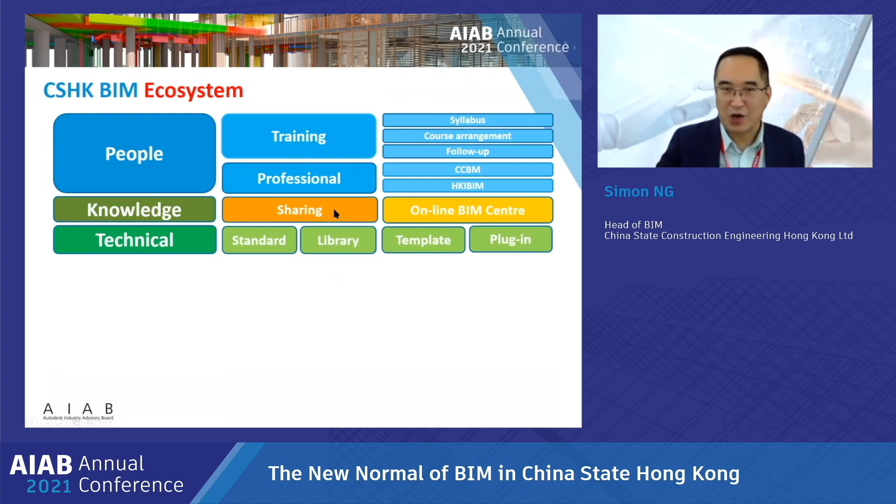Let me talk about our ecosystem. It consists of 4 parts. First of all is the people - we provide training and development to the professionals. Secondly, we provide knowledge, knowledge sharing, and an online BIM center. The third one is about the technical system - we have a standard library, templates, object library, plugins, those kind of things. And finally, we have the strong technical engine.

So we are pointing at our projects - we want to apply this to the projects. We have a team to develop the platform, tools and workflows which will be applied to the projects. The major software tools we are using are Autodesk based - mainly we use Revit, Civil 3D, and Navisworks. For the online platform, we use BIM 360, and we also have some development tools such as Forge and Unity.

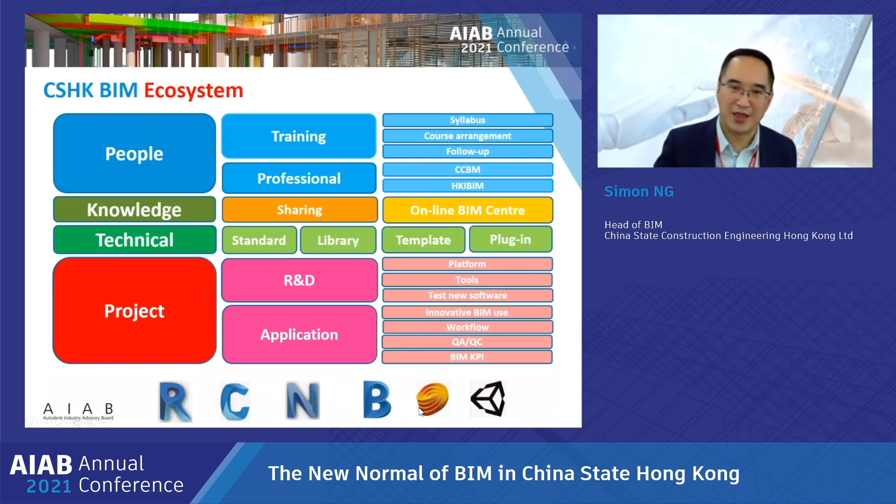Okay, so let's look at our BIM center. This is the center where we develop our people. Every day we conduct in-house training, developing different training programs to suit different needs. For example, some engineers need to produce modeling, documentation and drawings, so we offer full BIM, full Revit training for them. Some engineers only need to view the model, walk through it and present clashes, so we also offer such courses. Some people need management training, for example project managers, so we train them on how to manage the project. We also have specialized training programs for QS and BIM staff.

Okay, so this is our online BIM center. We provide updated market information and technology information across the company, which can break through the barrier across different projects.

Okay, so next, our technical system. We have four things: the BIM standard, the BIM object library, the Revit template, and the API plugin. All four are interrelated. For example, all the families in the object library follow the BIM standard, and the API plugin makes use of the template to automate some processes, but follows our standard.

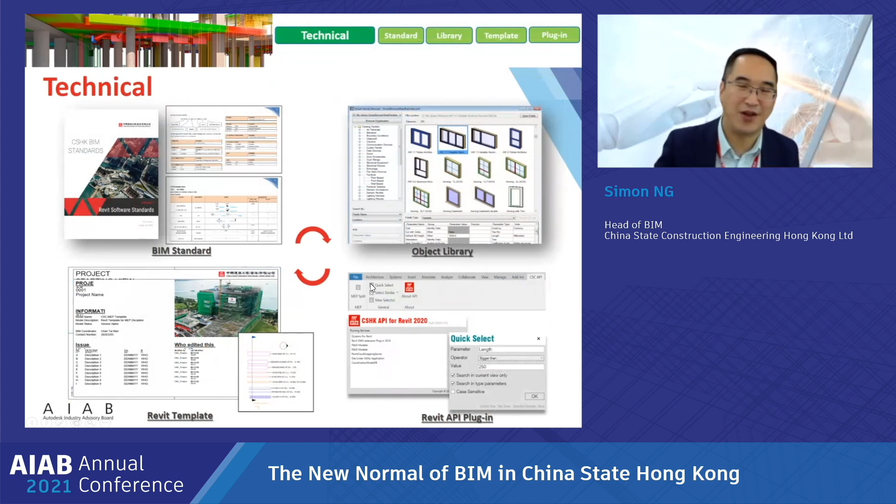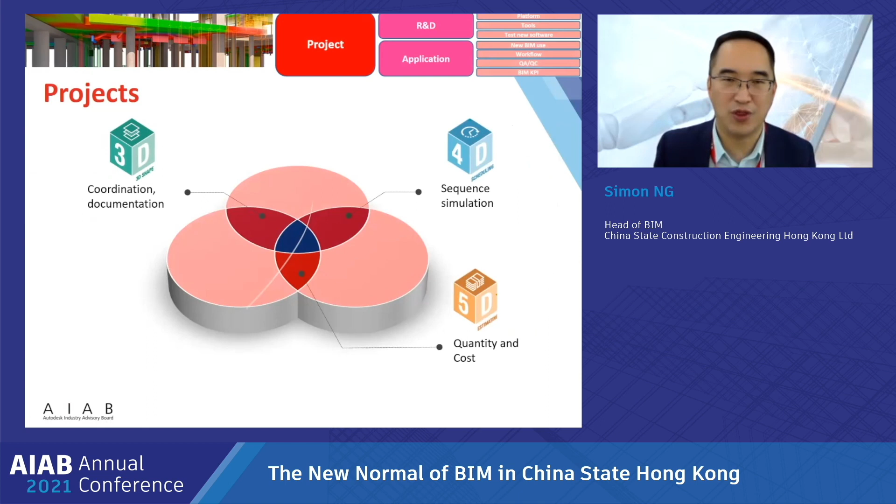So talking about the project systems, we have developed some normal BIM uses. Apart from the government mandates - everyone may know that government mandates 3D, 4D, and 5D - even though there is no mandatory requirement from the client, we will do 3D, 4D, and 5D in our projects. This is our normal use. We also provide a CDE, common data environment, using the BIM 360 cloud platform for all our projects. So 3D, 4D, 5D, and BIM 360 are normal to our project.

And then we have a number of innovative uses, such as VR, AR, and laser scanning. We will determine whether we use these depending on the needs of each project. We will also develop a lot more innovative uses, which I'm going to describe.

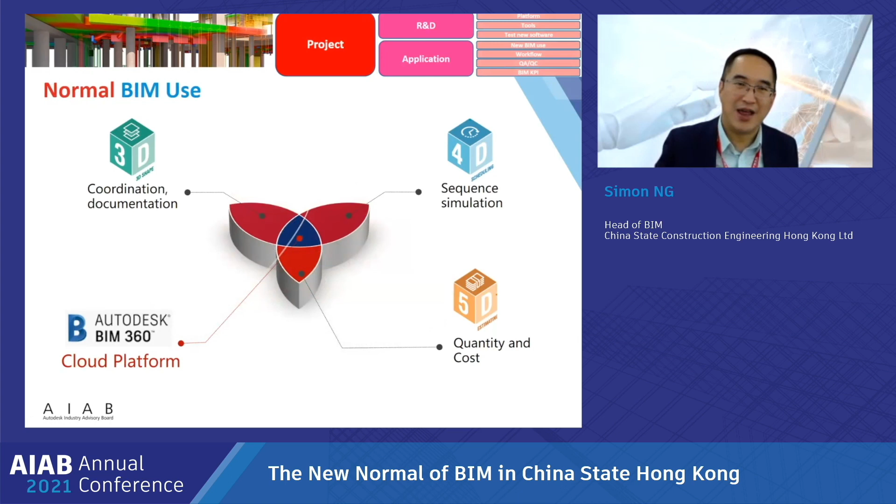So let's talk about our normal BIM uses: 3D, 4D, 5D, BIM 360. First of all, 3D - a lot of people know this is 3D coordination. But our target is to do real BIM, true BIM, which means we do 3D first and then generate 2D drawings. We don't do retrospective BIM. This is our target.

To facilitate that, we have developed some plugins to enhance our efficiency. For example, everyone may know that the most challenging thing for drawing production is the tagging - how to align all the tagging in a nice manner. So we have developed some tools to automate this process.

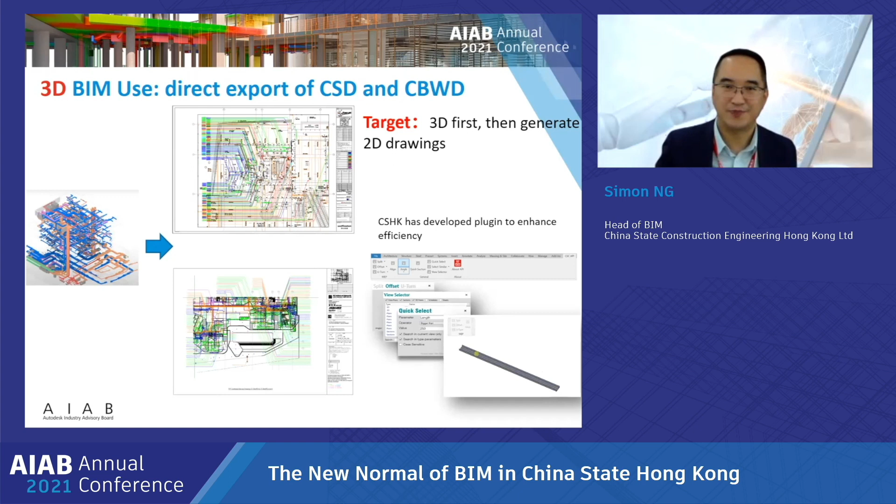So for 4D, our target is that we don't want 4D to just be a video deliverable sent to the client, that's all. We want to make 4D a live model that will be reviewed by our construction team from time to time. So we will produce 4D viewers and also trainings for the planners. We want 4D to be a matter in our progress meetings, to review and identify if there are any illogical things. This is part of what we call 4D clashes, apart from the 3D clashes - we also have 4D clashes.

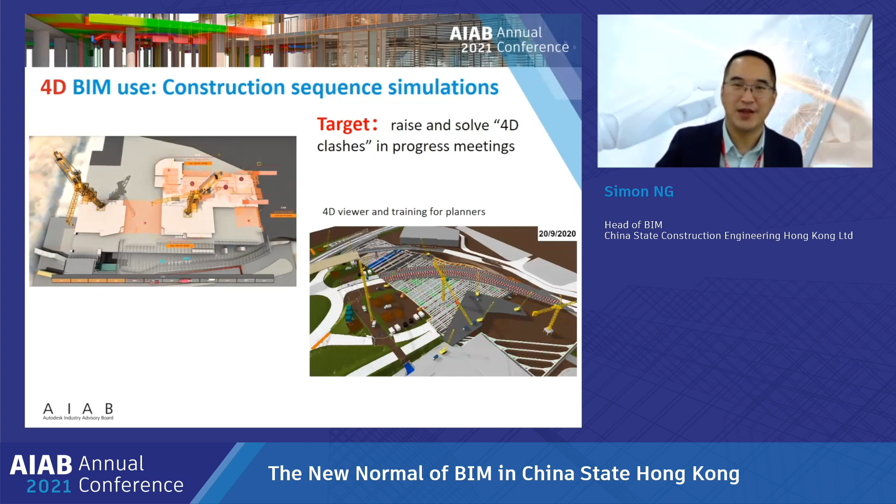Similarly, for 5D, we want QS to use BIM as normal day-to-day work. QS can obtain the BIM model to perform quantity takeoff. We have adopted a specialized QS software called Cubicost. The beauty of that is it meets the SMM for QS practice in Hong Kong, and it can produce the BQ of some elements that normally aren't easy to produce from Revit, for example concrete quantity, formwork, and rebar. We apply that for interim payment, VO, and remeasurement.

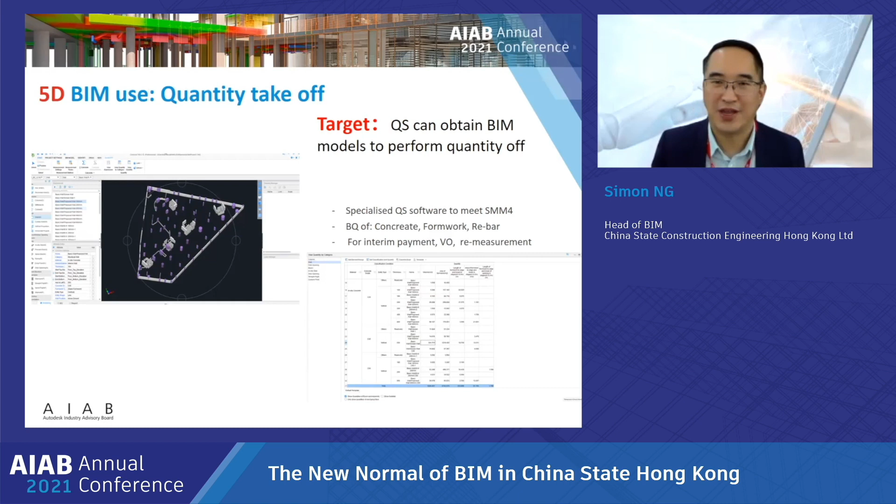So next one, common data environment, BIM 360. A lot of people understand common data environment as just a common platform for data, right? Technically yes, but I think the CDE is more about the management side, the information management.

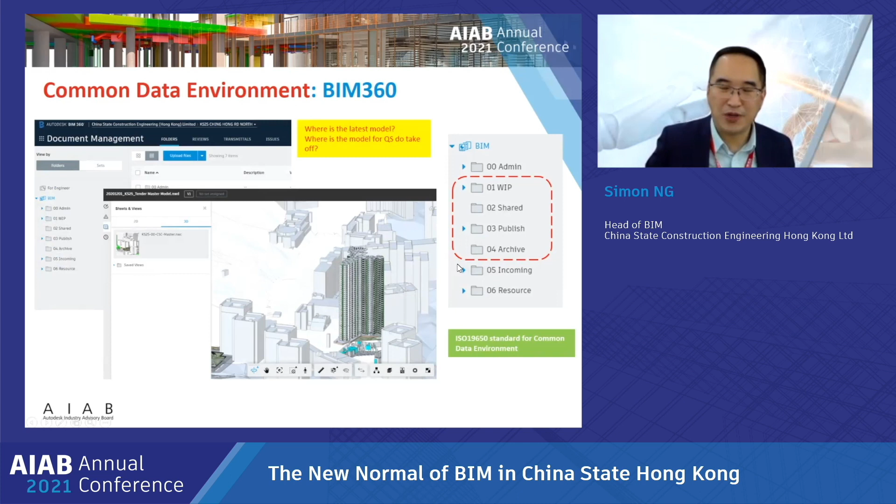For some questions, for example, where is the latest model? Where can I find the latest model? And if I am the QS, where can I find the model for takeoff? So in ISO 19650, it produced a very good standard for us, which is a 4-container concept.

So 4 containers, usually 4 subfolders: WIP, shared, publish, and archive. WIP means it is a working folder, so it is definitely the latest BIM model. It updates every day, every hour, but it is not yet finished and nobody verified them. So this is the working folder.

When it is complete to a certain stage of design, it will be verified by the discipline leader, and then go to the share container, the share folder, which is for coordination or other purposes. So when they share, we collaborate with other disciplines.

And when some problems come back, it may update the design so that it goes back to WIP and share. This is an iteration process until it is well coordinated and ready for submission to the client. And then it goes to the published folder.

So it is approved by the project manager or BIM manager. So this is published. And finally, archive.

One analogy I always use is a kitchen. WIP is the kitchen where they produce the ingredients and raw materials. When they're ready, they put it in the cook, which is shared - they fry everything all together. And then when it is finished, it goes to publish, which is the dishes.

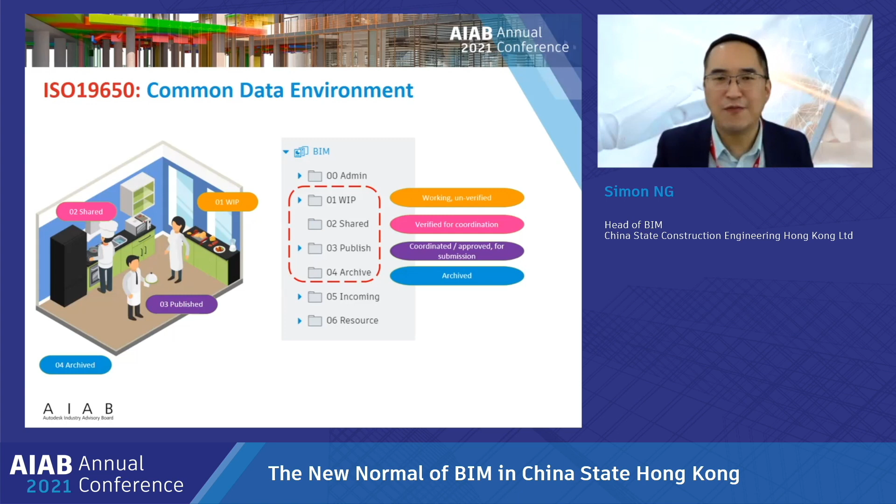So this is about the information management concept. ISO 19650 is about the information flow. We put it in our standard, and also in each BIM project execution plan, so that everyone knows where they will input the information, and where they will find the output of the information.

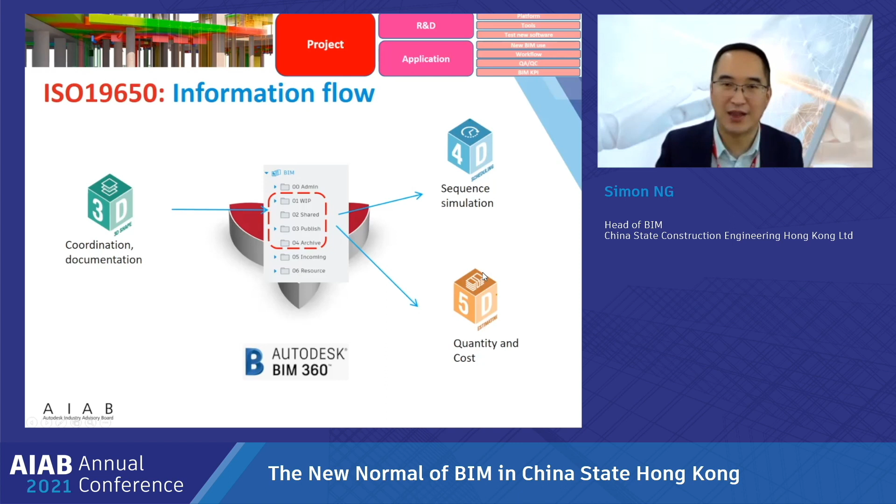For example, a planner will know where to find the model for their sequencing, and the QS will know where they can find the model for takeoff. Apart from our normal uses, we have a number of innovative uses. Let me go through one by one.

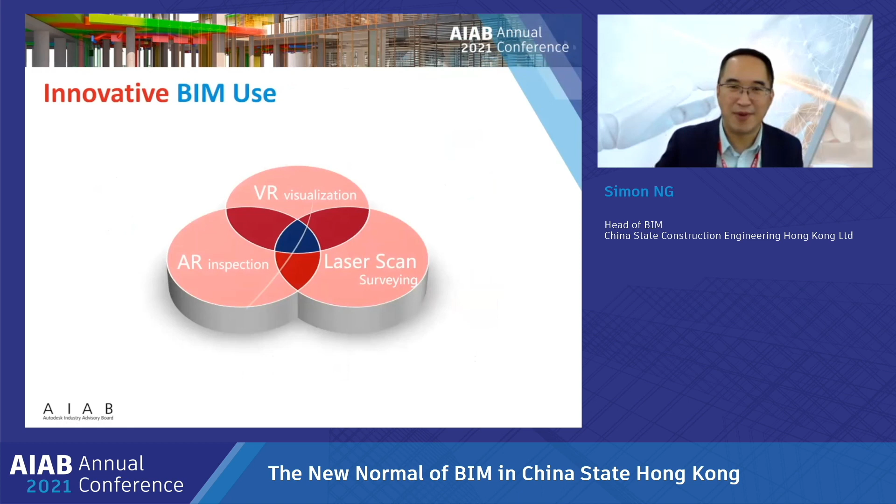First of all, this is about VR. Everybody may know that. In our company, we have adopted what we call the 2nd generation of VR - the Oculus Quest 2 headset, which is Wi-Fi based, and also enables multi-users.

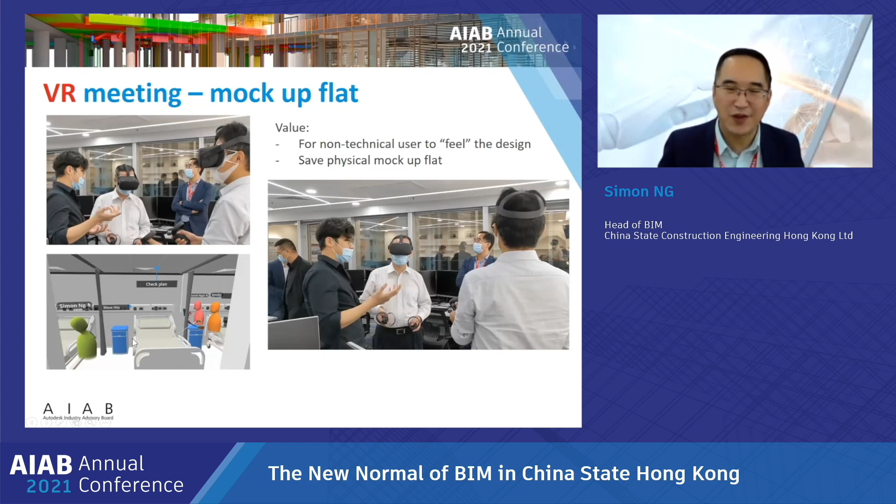The beauty of the VR meeting is to produce a mock-up flat so that it can enable - you can see this is a sample mock-up meeting - the non-technical user to have an immersive experience on the design. For example, this is a hospital design, so that the doctors and nurses can really feel the design, how they operate the hospital.

So apart from the visualization done by VR, we also make use of BIM for inspection and progress checking. The AR is a good tool we developed. These are the use cases where we overlay the BIM model with the site condition.

This is checking of the opening position - we see whether the opening positions are correct, and also the MEP routings. Another use case is the prefabricated facade. We don't want to find that it is not correct when it arrives at the site.

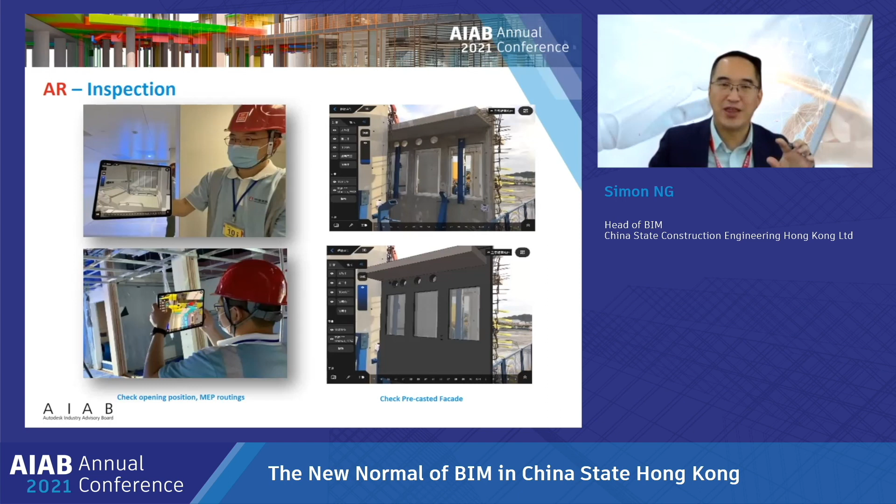So we perform the AR checking when they are in the factory. This is very good for AR inspection, providing a handy tool for us to do quick inspections. But to be honest, the accuracy is not that high.

So in some cases when we need high accuracy, we need to use laser scanning. For example, for structural elements, particularly in places where other services need setting out, like the lift shafts, or the structure for handling and connecting the facade. We need very accurate setting out, so we make use of laser scanning to scan the whole inside site condition.

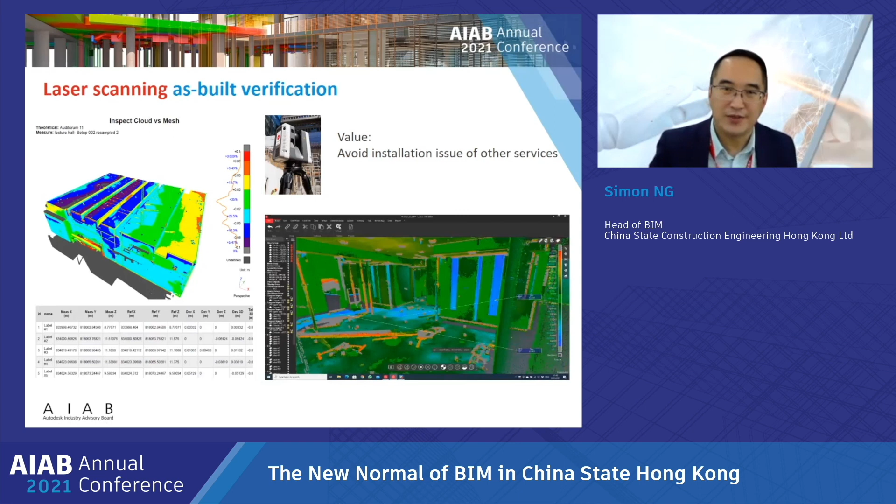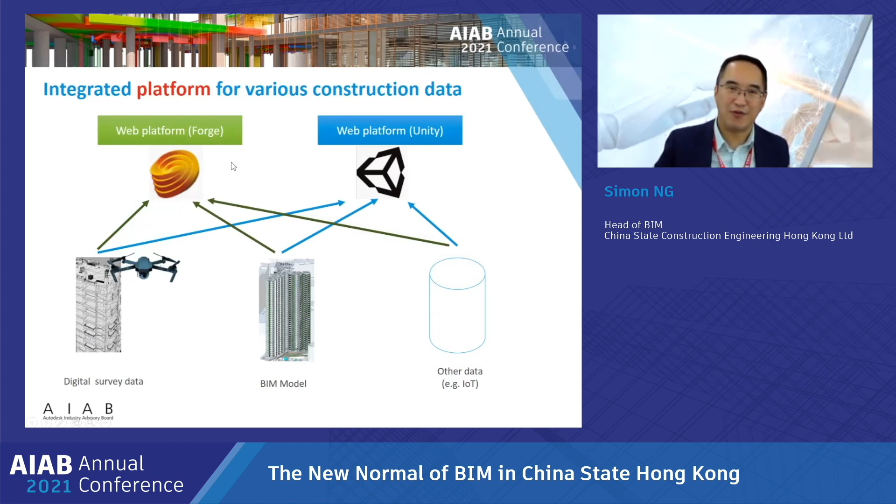We are doing a lot more of these 3D digital surveys, so we also need to develop a platform for various data. We get the digital survey data from laser scanning or drone data, and we have the BIM model, and other data such as IoT. We make use of two different tools, one is Forge, and the other is Unity.

Here are some examples. This is a formal photogrammetry. We set up a web platform very similar to Google Maps, so the engineer can easily obtain the latest site condition. We can do simple measurements, so the engineer knows the site condition well and can make a better decision.

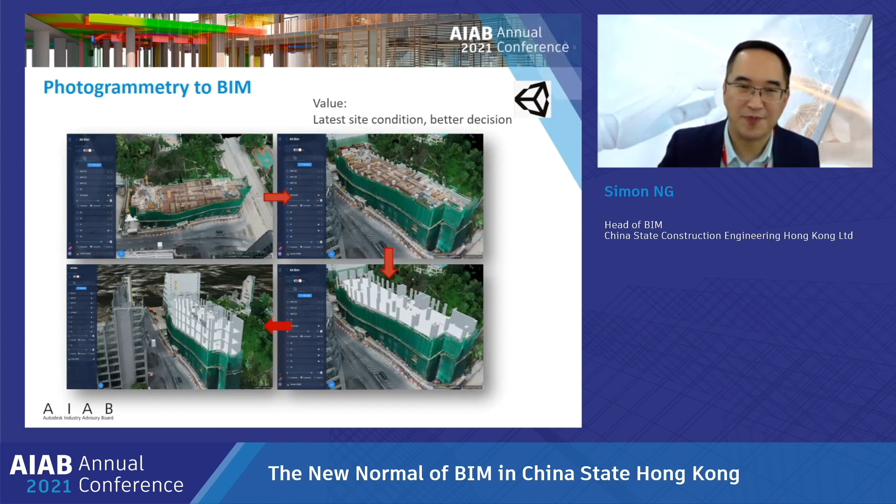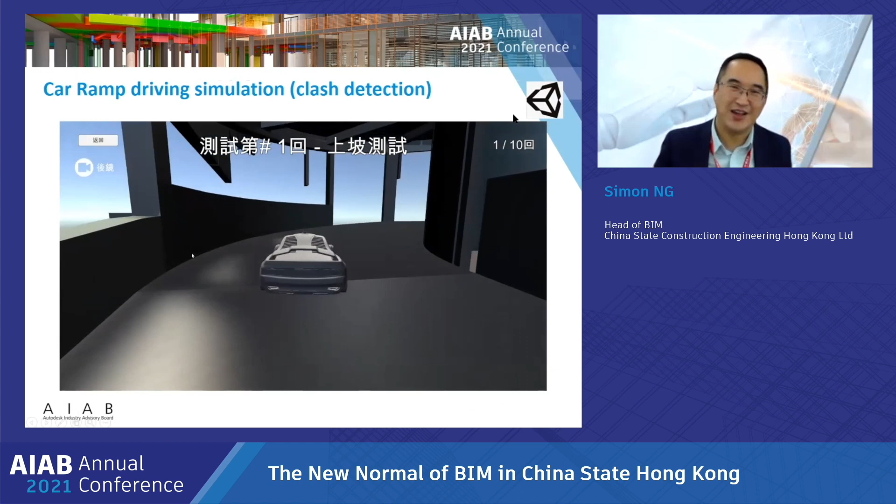This thing is very interesting. We use Unity to simulate a car that goes up a car ramp in a project, and we do clash detection to see whether there are clashes when the cars move up the ramp.

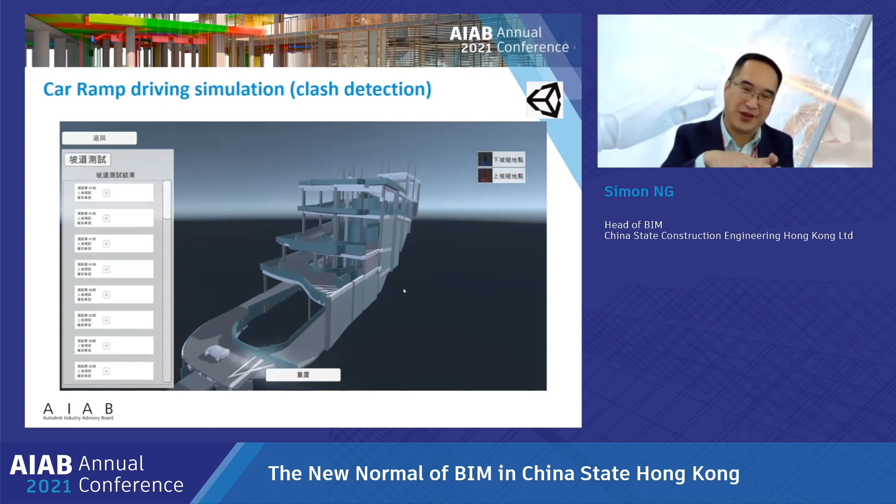So here is the result. Let's go to the result. This shows where the ramp will clash with the bottom of the car. Let's go to the result - okay, so this spot is the clash point.

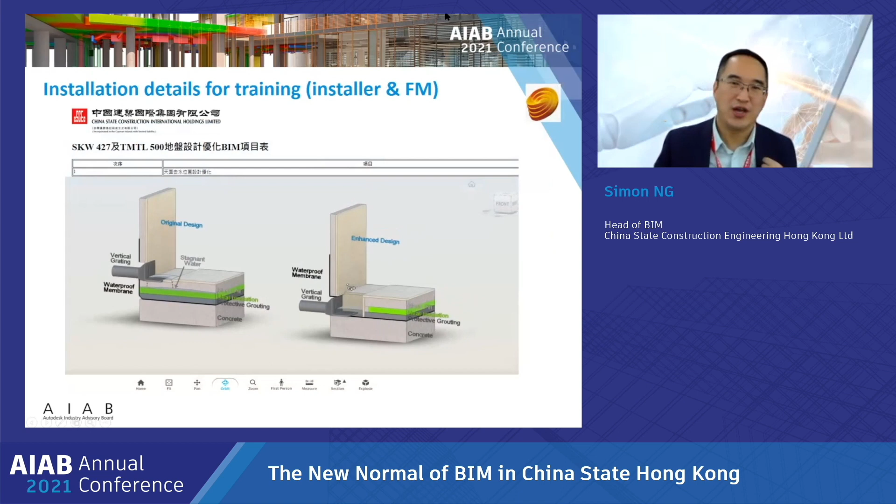Very interesting, right? Another application is that we make use of Forge, because with this we build up installation details. It is for training the installer and FM. We are using an explode function of Forge so it can give a very detailed explanation to the installer and also the future maintenance staff.

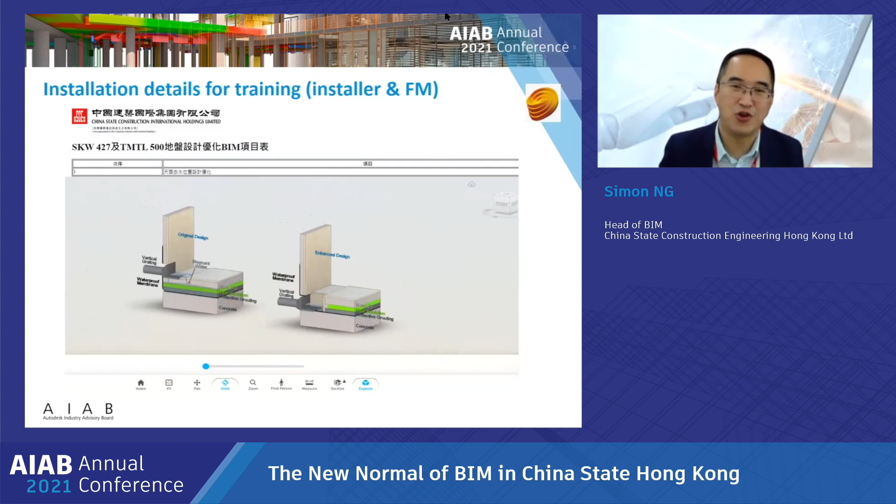Next, we also use Unity and Forge for integration with our smart construction site, which we call C-Smart. Our C-Smart site is an IoT platform with big data and AI, managing workers, machinery, safety, quality, and progress. With the integration of BIM, C-Smart becomes location based, so we can clearly see the distribution of workers in the BIM model. This helps management make better decisions.

So with so many BIM projects and BIM users, we will also set up a BIM KPI. We review each project and give them some scores according to the BIM use, the width of use, the depth of use, and also the participation - for example, how BIM is participated in by other teams.

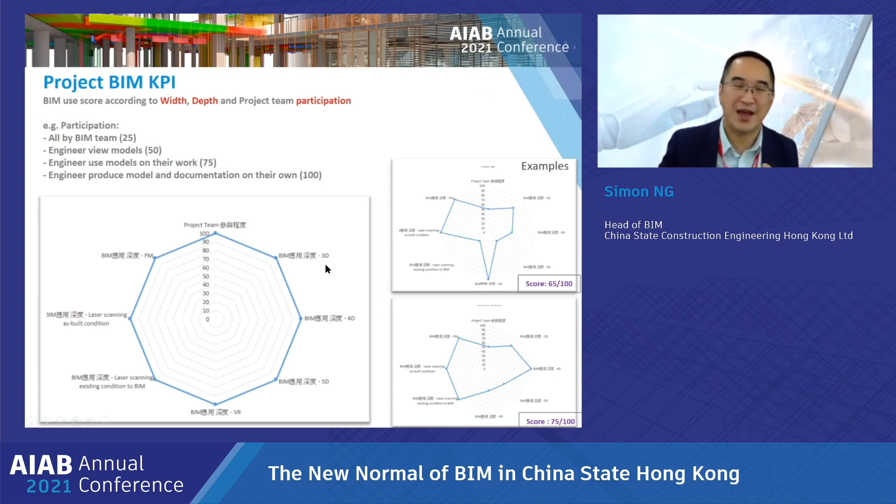If it is only used by the BIM team, that's 25%. If the engineers also view the model themselves, that's 50%. If the engineers not just view the model but also use the BIM models in their work, for example going to meetings or documentation, that's 75%. If the engineer fully uses BIM in their daily work, that's 100%. So we do such an audit of BIM and put together the KPI on an annual basis.

We have one of our medical center projects for COVID-19. When they visited our construction site, we showed them our AR, and she was really amazed and appreciated our effort, which is a very good digital platform for us. So with our efforts, it is also reported by some media, to demonstrate our capability.

Okay, so much for now. Let me do some conclusion here. So today my sharing is about how we set up the new normal, which firstly includes the new BIM ecosystem. It includes the people, knowledge, technical, and project.

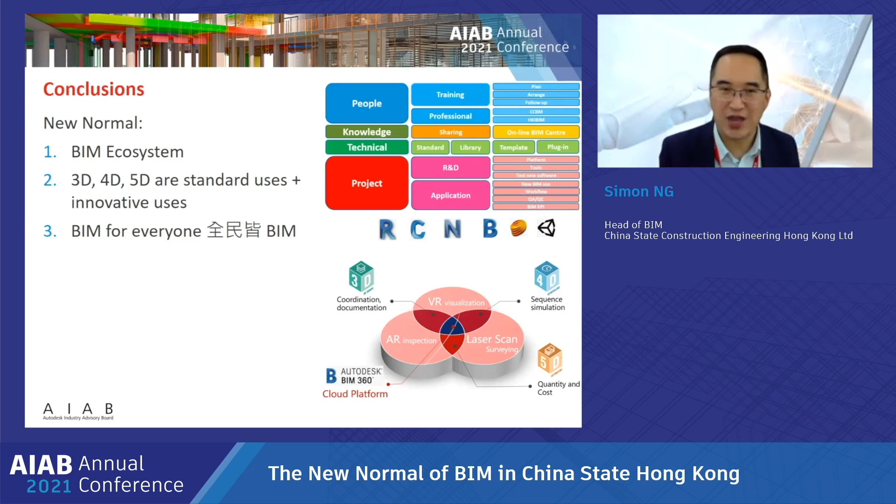Secondly, we set up our new normal BIM uses, which is 3D, 4D, 5D, and BIM 360. Finally, our vision is that BIM is for everyone. We want to make it like Word, Excel, and email, for everyone. So BIM is not just for coordination, but also for our supply chain, for our procurement, for our inspection, so for everyone, 全民皆 BIM. Thank you very much.

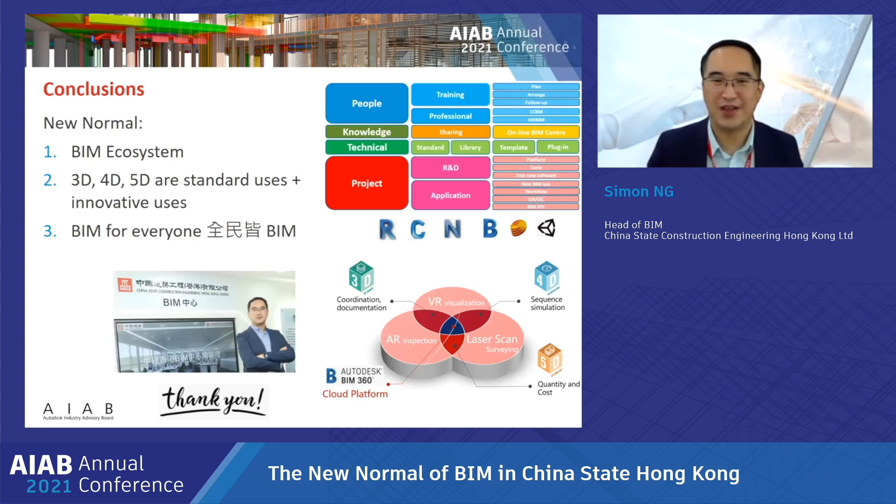One of our audience, Alex Lam, asked Simon how many team members are in the BIM team in China State Hong Kong now. Thank you, Maggie, for the question, and thank you, Alex. Now our team, the BIM team as a whole, we have more than 60 people. And if including our other supporting team in the back office, we have nearly 100 staff.